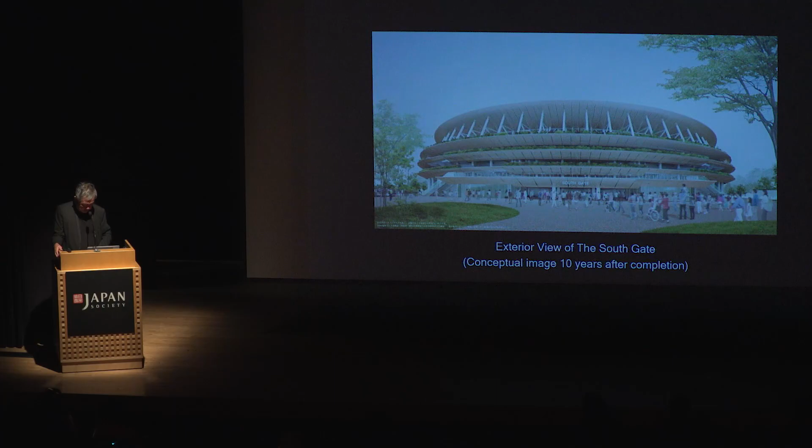We also got a hint from this building—the Horyuji Temple, a 7th century building. It's called the oldest wooden building in the world, as 1,400 years have passed since its completion.

The secret of this building is the section of the building. The 5-story eaves and 5-story roof protect the wood beneath, and also the wooden pieces are replaceable. It's very different from concrete buildings, because concrete is really difficult to replace piece by piece, but with wood, if some parts are damaged, they can easily be replaced. It's a very sustainable system, and we learned from it and applied that system to the stadium. It's 5-story eaves, the wood is protected and also replaceable very easily.

And for the ceiling, we also used Japanese wood. It's a composite structure of wood and steel, and structurally it is very challenging because it's a 60-meter cantilever, and we try to create a warm atmosphere by using wood.

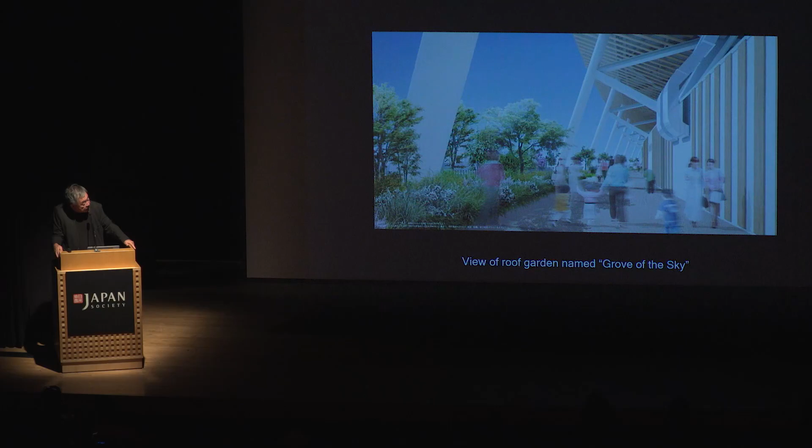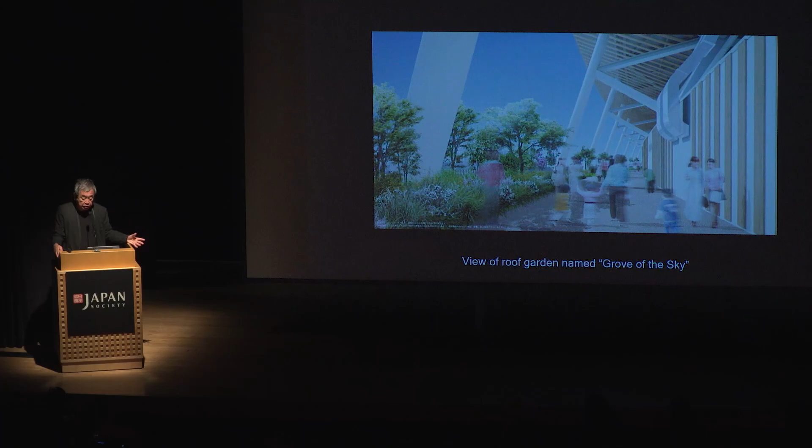And recycled material is used for every part of the building. This is my favorite space - we call it the Grove of the Sky. It rises 30 meters, 100 feet, and people can enjoy the view of Tokyo from this level.

And we also designed the creek. The rainwater is used for this creek, and the circulation is powered by the photovoltaic panels, electrically.

Because the intimate scale of those columns creates a warm atmosphere for the space, the size used in small houses is applied to the bigger building. It is very different from a normal wooden building - normal wooden buildings use glue-lam, but the dimension of big glue-lam is very similar to the scale of concrete buildings. Instead, we try to minimize the size and create intimacy in the big building.

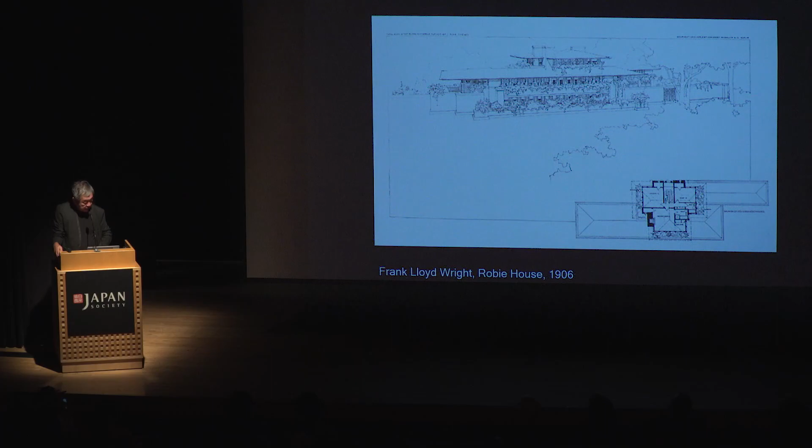And my Hiroshige Museum—we tried to create lines, transparency, and a void. The void we cut in the building is to create continuity to the mountain. In Japan, the mountain was always the most important thing for the town and village, because natural resources of the mountain

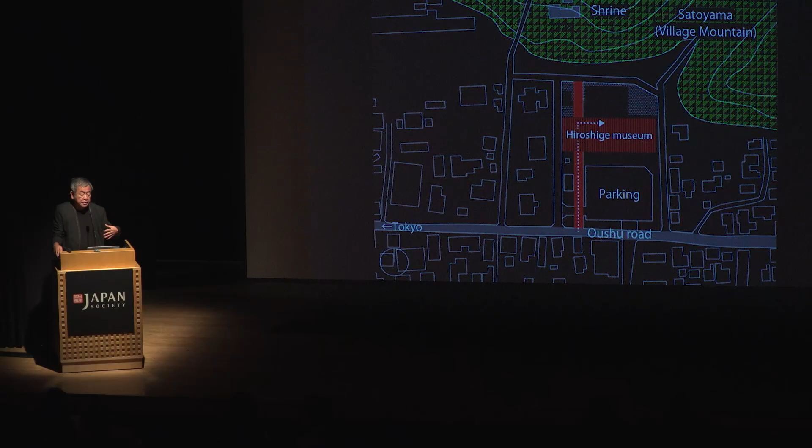were the basis of daily life. Material and energy—because there was no electric company, no gas company, the only mountain people could get energy. Also the fertilizer came from the mountain, and without the mountain they couldn't survive.

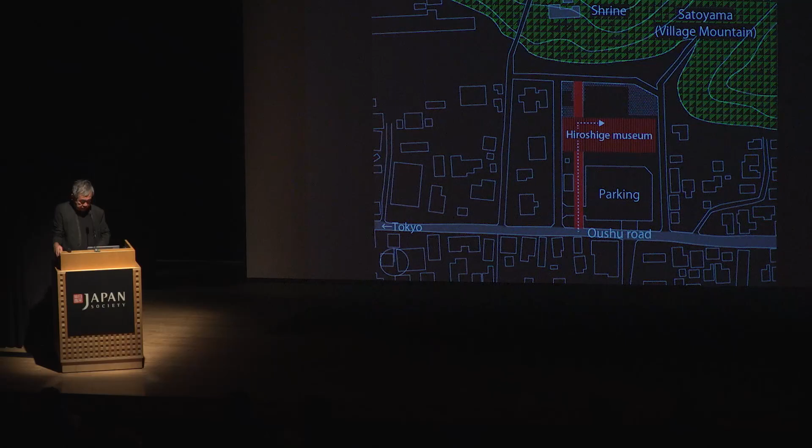They always built a shrine at the edge of the mountain. But in the 20th century, those shrines were totally abandoned, and people forgot the importance of mountain and forest. In this small village too, the shrine was abandoned and the mountain was in very bad condition. I talked with the mayor of the town about cutting the building like that, to connect mountain and town again—that is the reason behind the void of the building.

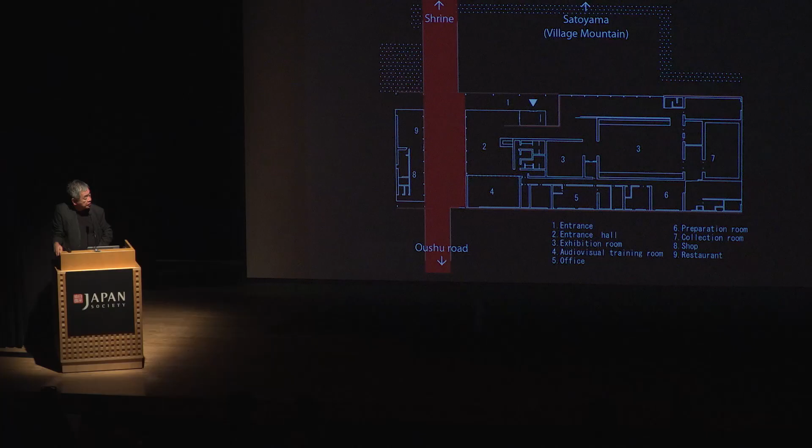This is a plan which connects the village and the shrine above.

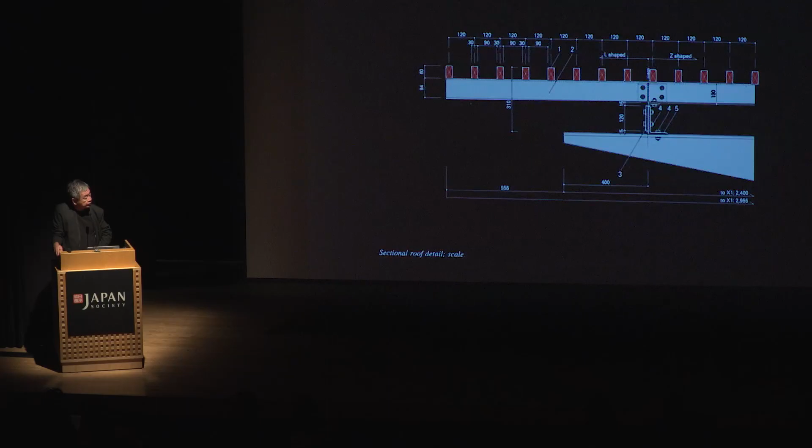Material-wise, we used local material as much as possible. The Japanese carpenters always said the best material for the building is from the mountain behind it, because the climate is the same, humidity is the same, temperature is the same, and the four seasons' rhythm is the same, so it will fit the building. For the rice papers, we also worked with local craftsmen, and the stone came from the quarry of the village. I could enjoy the collaboration with the local craftsmen.

And the furniture as well. In China, we also tried to adapt the same method. Besides the Great Wall, we designed the bamboo house. We didn't cut the topography—the building followed the landscape, following the topography. For materials, we used bamboo from the place.

And also the system of the planning is similar to the Hiroshige Museum—a super juxtaposition of layers to create depth through the screens. This is the tea house, a small tea house.

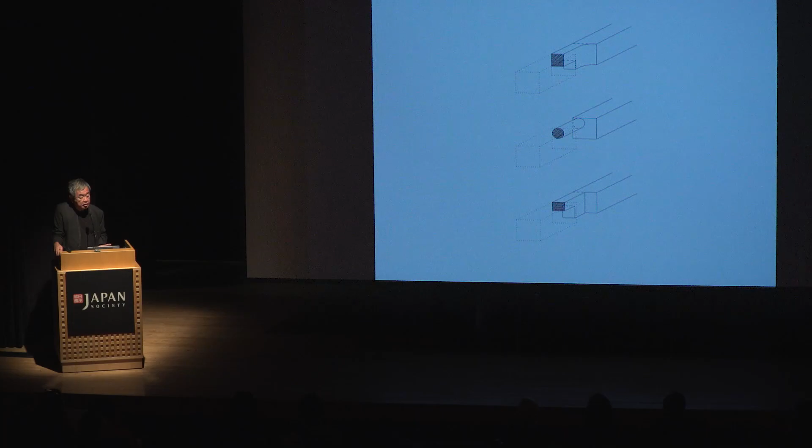In Europe, we also tried to show the craftsmanship of Japan. In this small pavilion, we used the special technique of the carpenters from Hida Takayama. Hida Takayama has a long history of wooden works, and this method is called Chidori joinery—it's a very sophisticated system. Without nails and without any metal, they can fix those joints.

We worked with students from my school, and they could also learn how to use wood. So our students often create a small pavilion with new materials, combining new and old methods and craftsmanship.

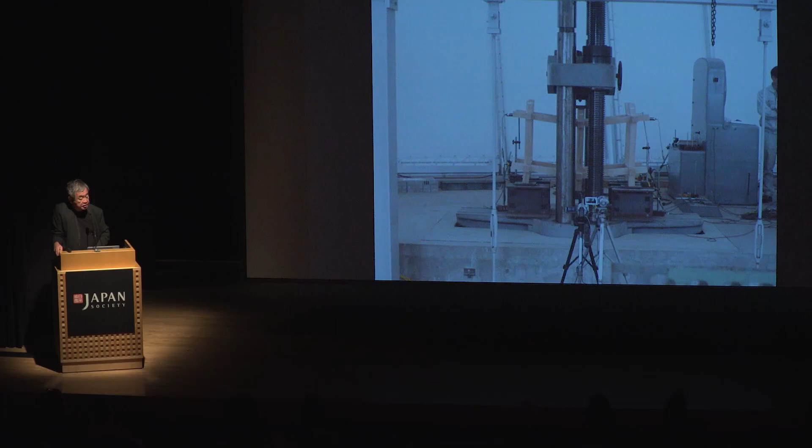After coming back from Milan, we applied that system to a bigger building. We tested the strength of this joint system and applied it to a 10-meter-high building. You cannot find any column or beam, because these small sticks are supporting the building. The dimension of the small sticks is 2 inches by 2 inches, but the joinery of the small sticks is very rigid, so they can support the building.

For bigger structures, we also use wood. In this small village, Yusuhara village, it is very far from Tokyo. From the airport, we needed to drive 4 hours at that time. Now it's 2 hours, but it's still very far from Tokyo.

But people want to use local wood for their buildings and bridges. Our idea is to work with a small local factory, because this glue-laminated beam, 30 centimeters high, was produced by the local factory. By using small units, we tried to create the big bridge, and the smallness of each unit gives intimacy to the building.

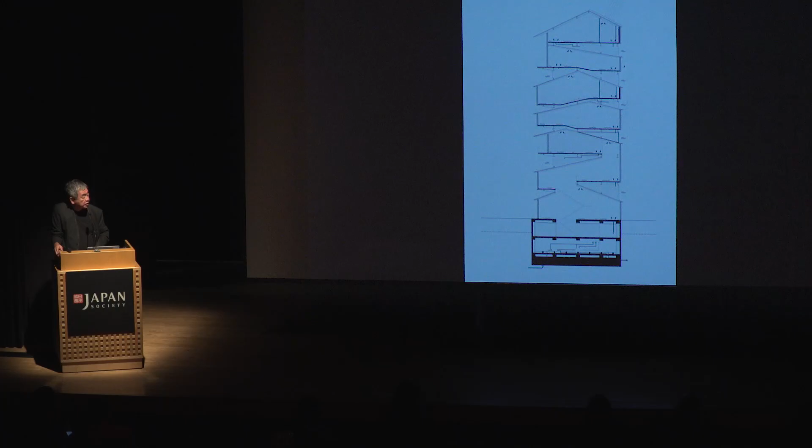The section is like that, because the requirement from the city was a 40-meter high building, but we thought a 40-meter tower wouldn't fit the landscape or the image of the place. So our idea was stacking 7 wooden buildings to create an intimate scale in front of the temple.

Here's the rendering, and the final building. There's a small theater on the 4th floor, and a cafe, so from the cafe we can look down on the temple. I think it can be a new solution for higher buildings in big cities.

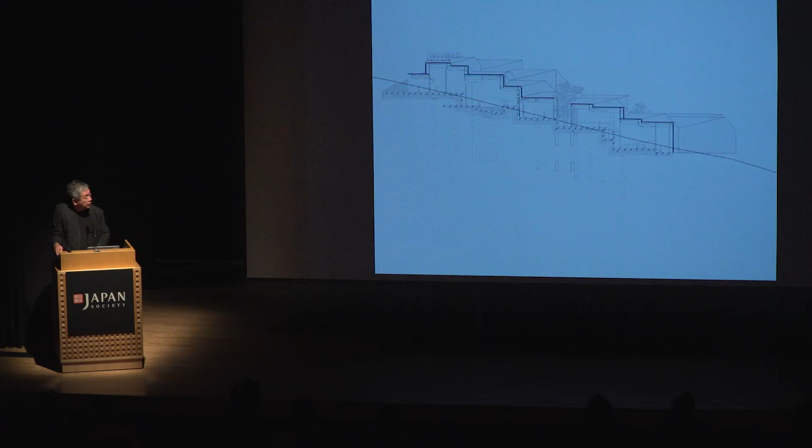And in China, we designed this museum in Hangzhou. The location is on a hill, and again, we didn't want to cut the topography. Following the landscape is very important for us, and creating an intimate scale is also important for this project.

That is the result, and it looks like a small village. We also used the local roof tile, ceramic roof tile, because the local ceramic tile was handmade and beautiful. In Japan we also use ceramic tile, but it's produced by a big factory - same color, same dimension, same texture. But in China, the colors are so diverse, and I like the beauty of this roughness of the material.

And we applied this material for the screen to create shadow for the space.

Because of the topography of the place, the floor is not flat - it follows the topography, the same idea as the Guggenheim Museum in New York. But in the Guggenheim Museum, the ramp is artificial, whereas in this case, it is following the topography.

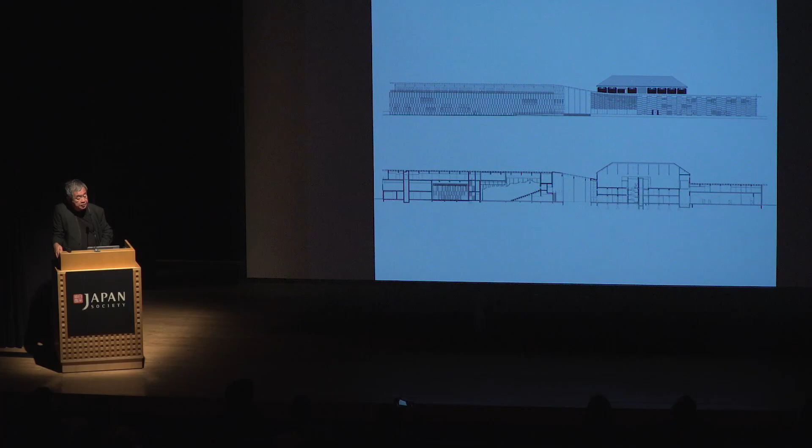And in France, we also tried the same method. Creating the void is sometimes very helpful to connect nature and town. This hall works the same way as the Hiroshige Museum. We also preserved the old building and added a wooden building onto the existing structure.

We call this the Engawa Space. Engawa Space is an in-between space between exterior and interior. In Japanese buildings, the Engawa is the most important space. If you visit Katsura Villa in Kyoto, the Engawa creates harmony between landscape and interior.

The same idea was applied in the French building, and we also did the landscape design for this building - the void creates the connection between the town and nature, like that.

Our recent project in France is this station, the Saint-Denis Pleyel Station, close to the Saint-Denis soccer stadium. The district of Saint-Denis is not the best location in Paris. Some terrorists are living in that area, and in my first visit the client asked me not to walk on the street because it's very dangerous. There's no good public space.

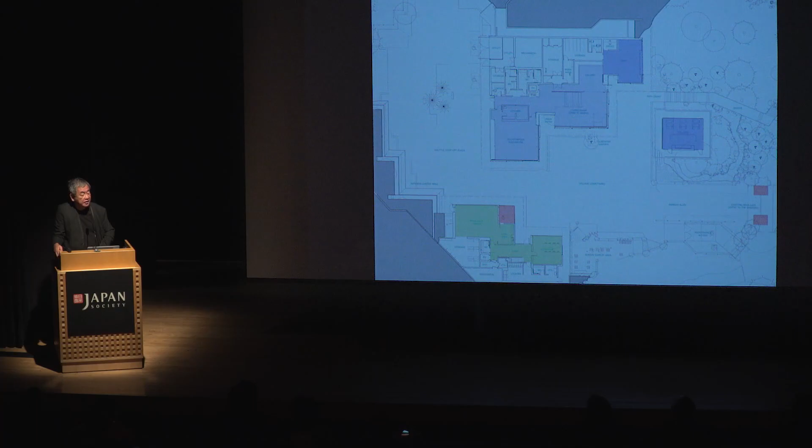This type of planning we call the goose-flying planning, since geese fly like that. The advantage of this method is to create open corners which connect exterior and interior. We have many corners, and some are totally openable like that.

In Dallas, we completed the Rolex building towers, and we created an intimate material and intimate scale. For the podium of the building, we worked with Japanese craftsmen.

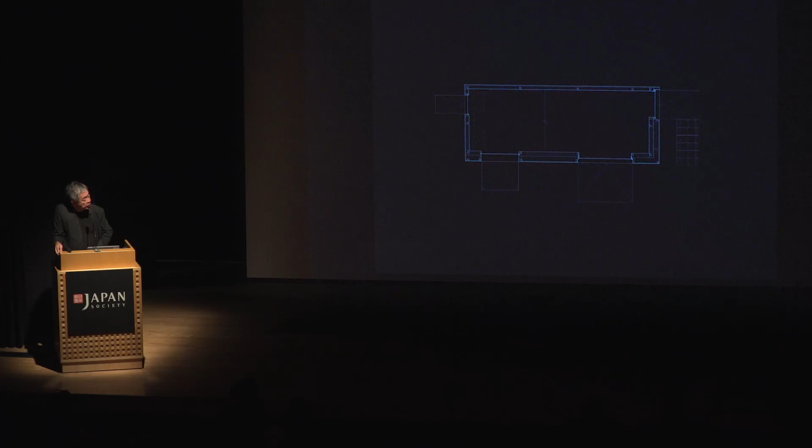The Jubako is a wooden trailer house we designed. Normal trailers are metal, but we used wood to create warmness and merge with the environment. People were surprised to see it in the city, in Tokyo, and we also used it for a small restaurant.

The last project today is a small wood block that we worked on with my old friend Ryuichi Sakamoto. He is the leader of NPO More Trees, and his idea is to activate Japanese forestry. He asked me to design a new type of wood block. The normal wood block is very similar to masonry structure systems, like brick and stone, but the idea of this wood block is very similar to Japanese wooden building.

In Japanese wooden buildings, the wood is not stacking - weaving is the basic method, and we applied that system to Tsumiki. Frank Lloyd Wright loved Tsumiki very much, and he mentioned the beauty of triangular Tsumiki. I got the hint from triangular Tsumiki to create this transparent Tsumiki. Thank you very much.